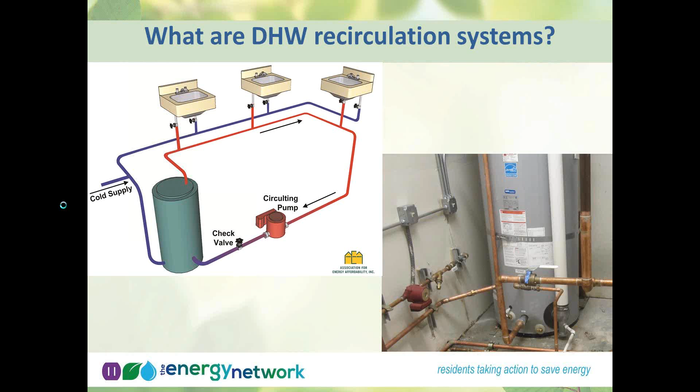So the agenda for today is to go through different types of recirculation control strategies, explain what issues might arise when implementing those controls or strategies, and then provide suggestions for evaluating existing buildings. Will your control strategy work, or will you potentially run into problems? And then if we have time, I'd like to discuss options for new construction projects as well.

And I'm going to break this down. The beginning, I think, will probably be more useful for building owners and auditors and raters alike. And then at the end, I'm going to get a little bit heavy into the diagnostic side. So spare me if that is beyond what you're interested in learning about. But if you're interested in getting into the diagnostics, that'll be in the second half.

Okay, so we have three different types in general, sort of groups of different types of recirculation control strategies. The typical recirculation control strategy is actually no strategy whatsoever, one where the pump runs continuously in the building. I would say this is what I see on most multifamily buildings, regardless of the building size.

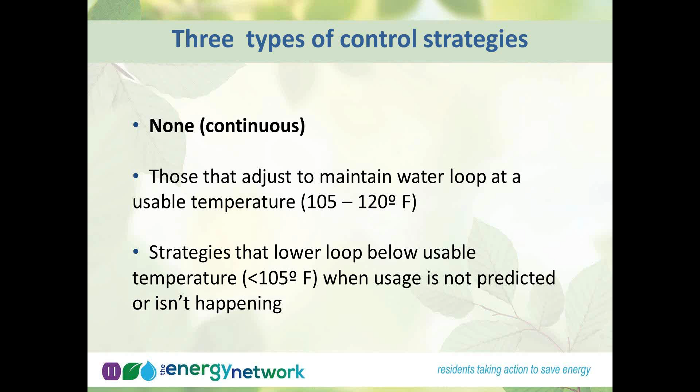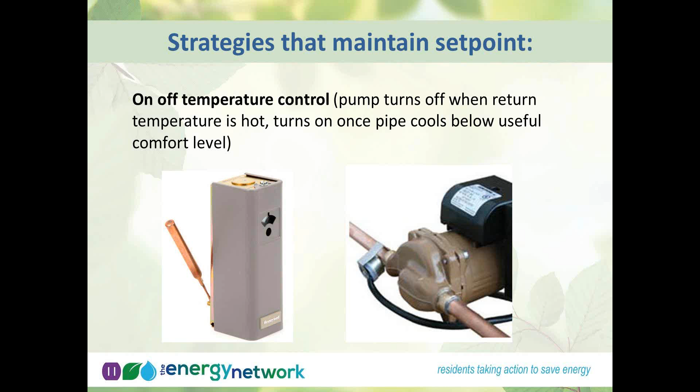And what's happening in this scenario is the circuit setter has been adjusted to reduce the total flow rate throughout the domestic hot water recirculation loop to just exactly the amount of flow that's needed to maintain hot water availability in the building. You'll see this a lot in buildings with aggressive water or hard water problems to reduce the corrosive effects of pumps that can damage piping over time. The other advantage is you can also reduce the flow rate to just maintain the temperature that you need in the pipe.

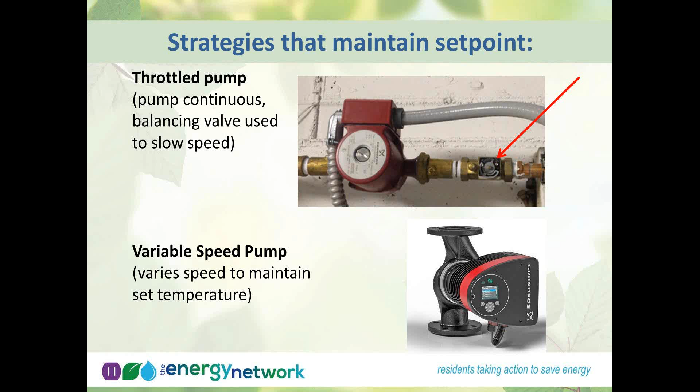And then we have strategies that lower the set point in the loop. And the idea here is that if nobody's using hot water, then you don't necessarily need to maintain usable hot water temperature in the loops. You only need that hot water to be at a usable temperature when somebody is about to use the water. And so lowering the loop set point can be achieved through the installation of a demand controller on your recirculation pump.

And these work by, there's a couple of different products available, but the general idea is that they will either use a flow switch or a temperature sensor to determine the usage patterns in the building, or when hot water is being used in the building. They'll use that information to only run the pump either when the demand is sensed or anticipated in the building, or when it senses that the return line has gotten too cool to be usable, and it might prime the loop just to keep the loop at a warm temperature, not cold, but not necessarily hot.

Then they have, I think a lot of you will probably be familiar with the single family demand type controlled pumps, which are a small pump that is controlled by the occupant of the building with either a push of a button, the activation of a motion sensor, or some other sort of trigger that will turn that pump on and circulate the water throughout the loop.

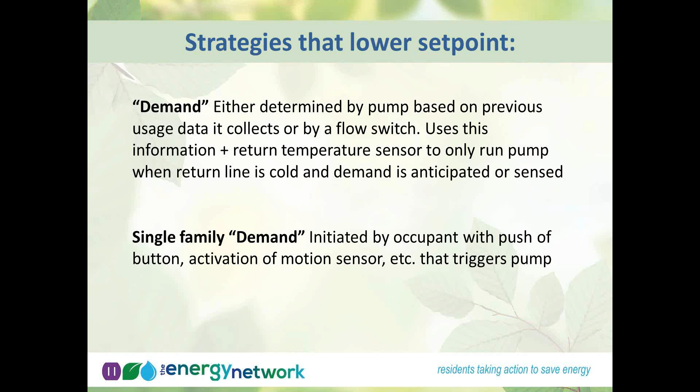And those are typically more prevalent in either single family homes or I would say very small multifamily buildings, lower than 5 units or 6 units, where maybe each tenant has a button, but typically not seen in multifamily central hot water systems. There's a couple of other controls that lower the set point of the loop in the building.

Another control option are what they consider to be boiler set point controls. And these don't actually control the recirculation pump, but they control the set point temperature of your domestic system. And sort of like a demand control, they will watch the demand profile of the building, and when it's sensed that there's not a large demand, that will reduce the set point temperature of the domestic system. I see this really as more of a load matching control than a demand control.

So when demand is sensed, the temperature will be increased in the system to what's anticipated that's needed, and when the demand isn't sensed, it will lower the temperature down to what still would remain as a usable temperature. And this is usually happening at night, or if you have a building that has a lot of working families, maybe during the daytime as well.

And then another sort of strategy that you might see are timers. And many recirculation pumps that you buy for domestic hot water recirculation will come with a timer built into the pump. I believe Title 24 code requires some sort of recirculation control, and one of those is a timer and aquastat type control. Unfortunately, in multifamily buildings, especially in larger multifamily buildings, we typically don't recommend a timer,

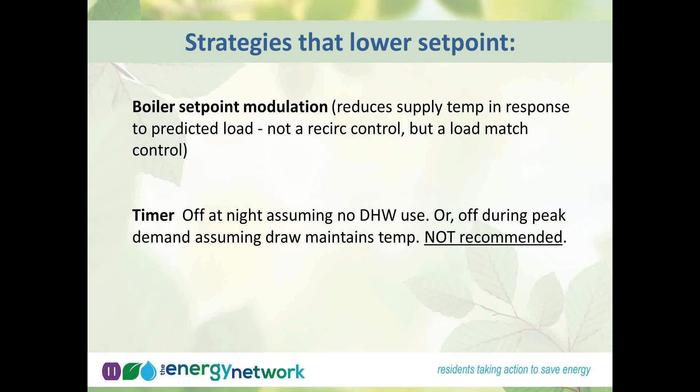So at this point, we've gone through the different control strategies, and I'd like to talk about the issues that might come up when implementing controls. And before I move forward, does anybody have any questions on any of the previous slides?

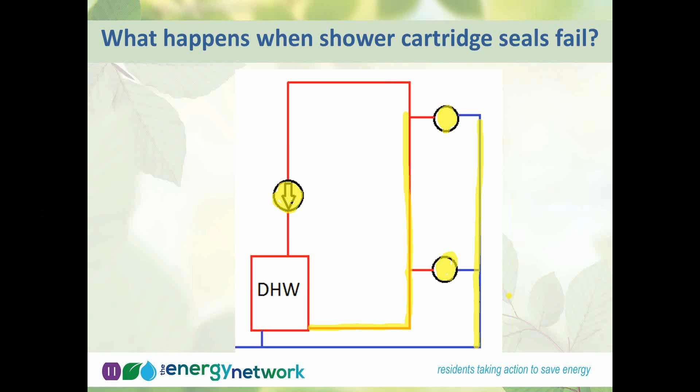Oh no. Highlights. There we go.

So what can happen with old mixing valves or old mixing cartridges that begin to fail is this issue called crossover, wherein somebody on, let's say, the second floor up here is using hot water, and the mixing cartridge seal on this first floor, if that has begun to fail, it may allow cold water to come through passively through this valve, enter the hot line, and come up here to the second story valve.

And so this person on the second floor will complain of either cool water temperatures coming out where it never quite gets hot, or it takes a long time to get hot. This could be a symptom that the unit below them or upstream of them, that their cartridge mixing valve has started to fail.

And this is typically just in single handle cartridge mixing valves, although there are some other instances where you might see crossover happening, typically in older washing machines. There might be a cross connection in a washing machine. And another anecdotal typical instance is if you have a janitor closet somewhere where they've installed their own shutoff valve on the sink and leave the handles turned on all the time. Those are opportunities for crossover in a building.

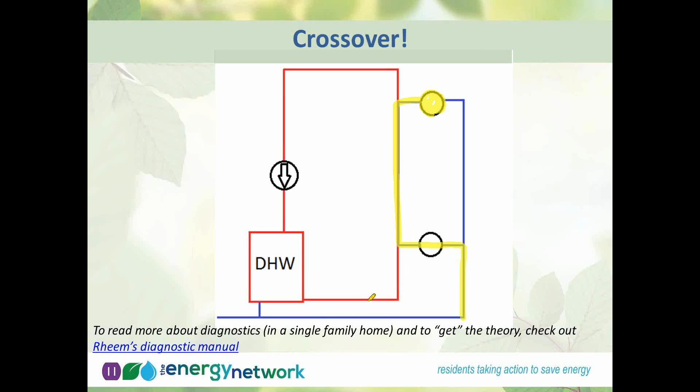So I think the point here with crossover too is that it's typically masked. The issue is masked when you have a constantly recirculating system. So in a constantly recirculating system, you might move enough water through this loop to dilute this cold water that's entering the line. And if that's the case, residents might not complain or might not know that there's a crossover issue until you start turning this pump on and off, which will allow the line to cool and allow this cold water to enter.

Some other symptoms of understanding when you might have a crossover connection with a constantly recirculating pump is if you go into your boiler room and you notice that the return line temperature, if you have a gauge or if you can measure the temperature of the water, is significantly lower than the temperature of the water going out to the building. So a large delta in temperature between the return and the supply can indicate that you have crossover.

I would say that in most buildings, if you don't have a large demand on hot water, a 5-degree temperature drop would be normal. A 20-degree temperature drop would be abnormal.

And then here we have a link, which I think we'll follow up. That link should work when you get your slides afterwards. That's a pretty good diagnostic manual for how to find crossover issues in a single-family building. But the idea and practice for diagnostics are well described for the single-family building.

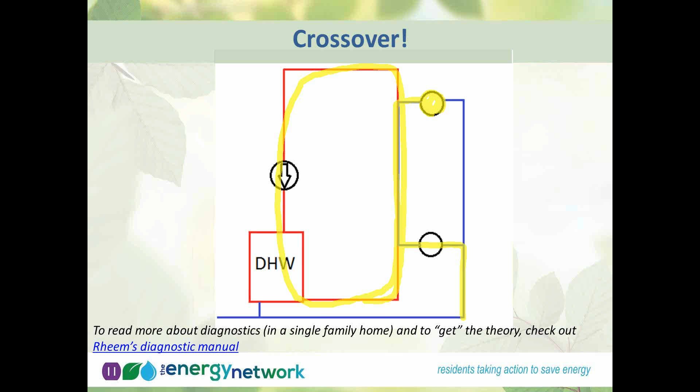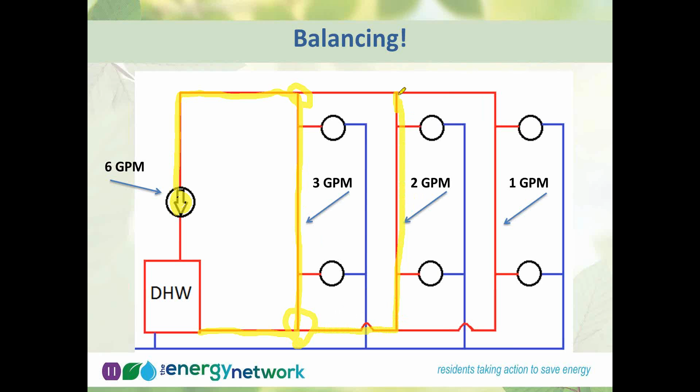And to explain this, you have the pump here that's circulating continuously. And it is going to look for the path of least resistance here when the pump is running, which is this path right here, closest to the pump. Most of the flow is going to go through this first riser unless there's some mechanism either here or here to encourage water to go to this second riser. So most of the water will go to this first riser, then some is going to continue to be circulated down this second riser, etc., down to the third riser.

So in practice, in a constantly recirculated building, this issue might not be noticed. You might move enough water through these further risers so these folks don't know that there's a reduced water temperature, that there's an issue, because you're constantly moving hot water through the system.

But in a bigger building, or in a building where maybe this is more aggravated, what can happen is this can actually result in a bigger spread of temperature imbalances. So that furthest riser might only be getting enough flow rate to maintain what would be considered less than usable temperature in the hot water line. And this can typically be aggravated when you start controlling that pump.

If you start turning it on and off, the first riser might look like it's fine. So the stack of folks over here will say, we're getting plenty of hot water. It's 125 degrees. In the boiler room, you look back here at the pump, you're getting 115 degrees back at the pump. This would indicate on first glance that everybody's okay. But if you go out here to this furthest riser and this pump is turning on and off, this third line might be cooling.

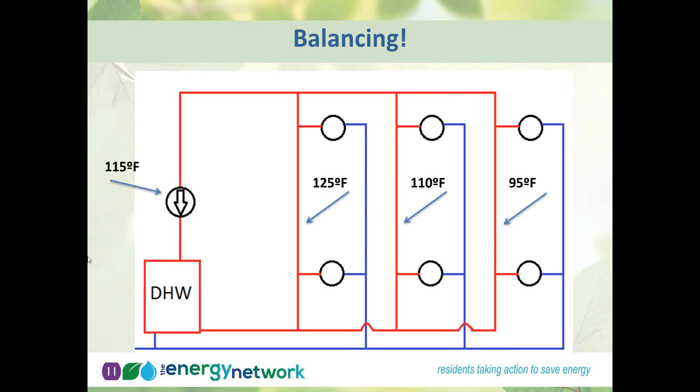So here's some other issues to consider when thinking about domestic hot water distribution in your building. I think most of us are considering or have installed lower flow shower heads and aerators, especially in light of the current drought. The thing to consider, however, is that by lowering the flow rates of those devices, that will further slow whatever delivery time you currently have to the fixture. So it's something to keep in mind.

I think we would always push to use more aggressive and lower flow rate shower heads and aerators. But if you currently have a delivery problem, sort of a long delay time in an apartment, this will make it worse. So this is sort of a flag to determine why the delivery time currently isn't working and come up with some strategies to fix that, in conjunction maybe with installing shower heads and aerators.

Contractors are pretty knowledgeable with standard recirculation control systems, but, to generalize, they're just starting to become familiar with central system demand controls. So if you're trying to implement a new strategy, you will want to look for a contractor that has previous knowledge with the system, or work with a manufacturer's representative who can work with you and the contractor to make sure the control is installed properly.

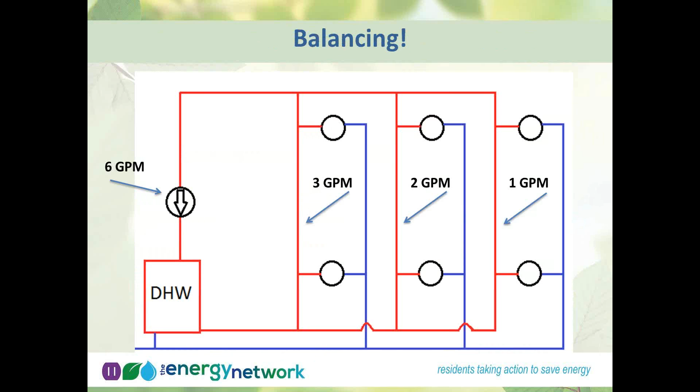So one other thing I didn't mention on crossover that sort of helps understand why this might happen is that the cold line is coming in at your city pressure to the building, which might be, for example, 50 psi. The recirculation pump, when it's operating, induces a lower pressure in the return line that's before the pump, which will lower the pressure on this line.

So typically, crossover happens when you have a higher pressure water moving to a lower pressure water. So in this case, cold moving over to hot. And that's, I would say, more typical, but I have heard of the opposite being true, where hot can move into the cold line.

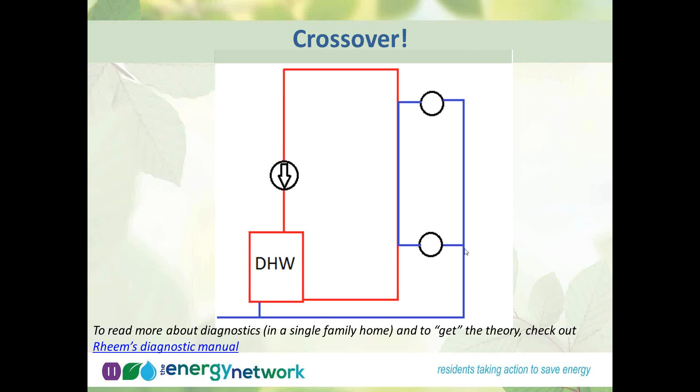Okay. Is it possible that it's an example of cartridge seals failing? It could be, although I would look for any other sort of crossover opportunities that might be happening at the building. The washing machine example or the janitor closet example. But I'll talk a little bit about cartridge mixing valves and some suggestions for how that might get fixed as a trial. Great.

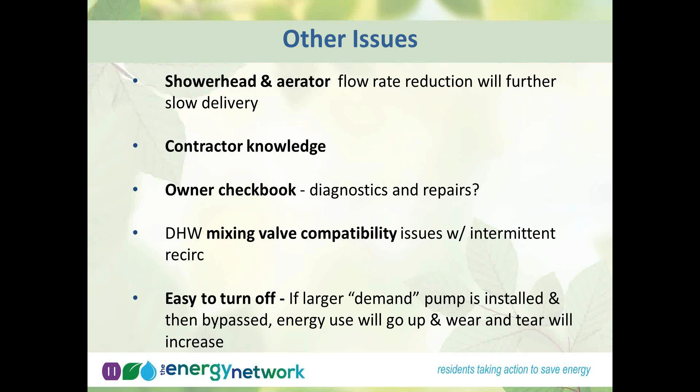Got lost here. Okay, so my other two soapbox notes here on controls are that the studies I mentioned at the beginning of the presentation focused on gas savings. I'd really like to see future studies also include water consumption monitoring to make sure that we're not just looking at one half of the picture.

We want to make sure that we're not causing any sort of additional water use where, let's say, a control gets installed, it's doing what's expected, it's cycling the pump, but maybe residents now have to wait longer. Maybe Joe in that upper apartment has to let the water run for 5 minutes to get hot water. We want to make sure, especially in California, that even if we're saving some gas, we're not wasting water in the process.

And then, lastly, if you have a domestic hot water recirculation problem in the building and you implement a control strategy, those problems will only get worse. They're never going to solve your problem. So that leads me into, how do we know if we're going to have a problem? And then what do we do to fix it? I'm going to try and speed up a little bit here too.

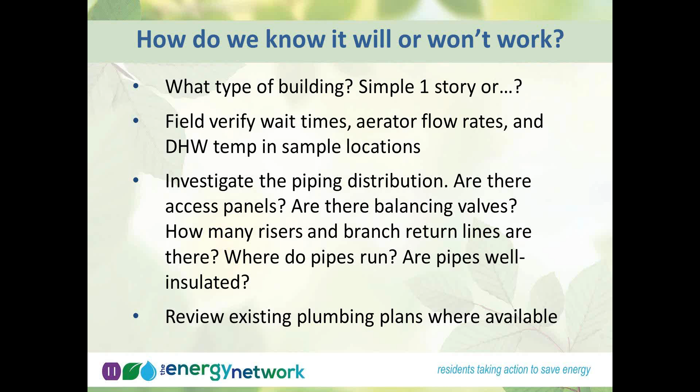Interview the staff. Ask them if they've had any temperature complaints. And you might be able to ask residents this as well to get their opinion, because sometimes maintenance staff don't always have the same story that the residents have.

You could ask the maintenance staff, hey, if this recirculation pump turns off, how long does it take to have a resident complain? And if they say, oh, usually a few hours or 4 or 5 hours, then I think that would give you pretty good confidence that cycling your pump on and off will not create an immediate problem.

But if they say, if I turn this pump off, I'll have a complaint in 30 minutes or an hour, that might be a good indication that there's something happening out in the field that needs to get fixed.

You can ask them how often they change their cartridge mixing valves. And if their answer is, what's a cartridge mixing valve? Then you probably have a good indication that no maintenance has been done on those mixing valves and that repair is needed. Same thing goes for a question about crossover.

If you ask them about whether they've had crossover in the building and they're not familiar with the idea, then that might give you an opportunity to dig a little bit further. And conversely, if they know about crossover and they know about cartridge mixing valves, then that would give you some reassurance that maybe some preventative maintenance has been done.

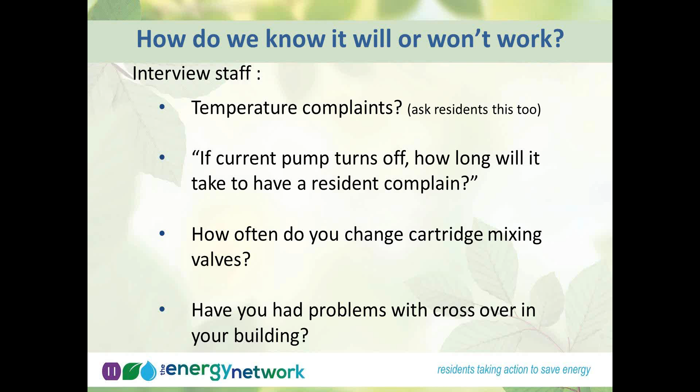So some other suggestions here. Find those plumbing plans if you can on these larger buildings, and study and understand the distribution system, and ask for help from colleagues if needed. I would definitely recommend bringing out a manufacturer's representative of whatever control you're planning to install to have them assist in understanding whether their control is compatible with the project, and to be part of the team to make sure that the project is a success when you do put that control in.

And then another suggestion is to read Dan Holohan's books. Dan Holohan is well known for writing books on domestic hot water, hydronic, and steam systems, and he has really good suggestions on how to understand how water moves through a system or through a building. He always likes to say, think like water.

And a domestic hot water system is a lot like a hydronic system until somebody opens a tap. So understanding how hydronic heating systems work can help you understand how a domestic hot water recirculation system will work. And I always recommend, find the problem in the building before it finds you, and make sure you have a solution developed to fix that problem if it does show up.

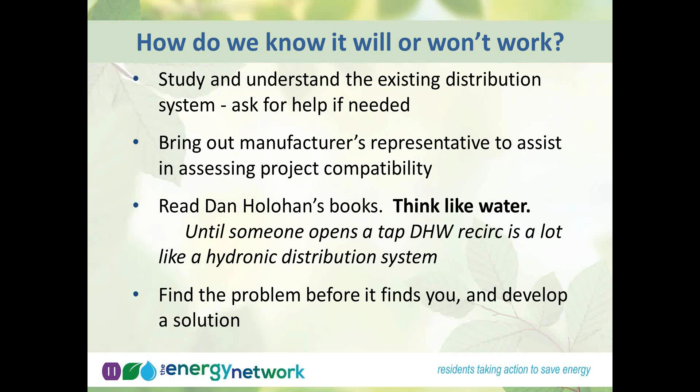Getting back to the checkbook, make sure you have a budget for making necessary repairs. As we said beforehand, controls will make a situation worse if there are existing issues. And then identify what control strategy is most appropriate.

If you look through the plumbing diagram, and making a demand control work in a large, complicated property or distribution system does not seem like it will be feasible, or will be complicated or expensive, a simpler control strategy may be the right strategy for that building. Again, we don't want to put a control in a building where we might cause an issue that leads to significant water waste.

And then you'll definitely want owner and staff buy-in. If they're not bought into the project, then you might install a control, and if it doesn't work, a week or two later, it might get bypassed, and that basically is money down the toilet. They invested in something that isn't working.

So you really want to make sure they're engaged in the project and bought in, and make those repairs visible to the owner that you've identified early on. They currently don't know that there's a problem sometimes. That crossover issue might be happening, but they don't know that it exists. You have to make these necessary repairs visible to the owner.

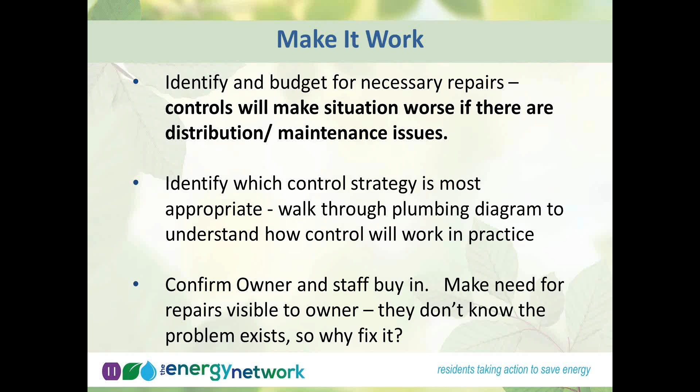And then the last thought here is a suggestion for phasing improvements to make your troubleshooting more effective. If you install aerators, you install controls, and do lots of work on the system all at once, and then start getting any sort of complaint, you'll have a hard time deducing where that complaint is coming from, or what the issue is. So my suggestion when you're working on domestic hot water recirculation control is, first, make sure you solve all of your known problems first. Make sure all of the apartments quickly receive consistent hot water.

Then install any low flow devices that you're considering, so shower heads and aerators. Wait a little bit, let's say a week or two, make sure there aren't any new problems. And then three, once you've ensured that there aren't any issues, install recirculation controls, and then make sure there aren't any new problems.

And I think another thing to mention here, something that happens typically that I run into, is you don't know the problems exist until you actually start talking to your residents. So I would even say with number one, interview your residents and find out if there are any issues. Then if there are issues, you can solve them first. You don't want to get down to the end of your project and find out that Joe in that apartment has been having a problem for 5 years, and always lets his shower run for 15 minutes before getting hot water.

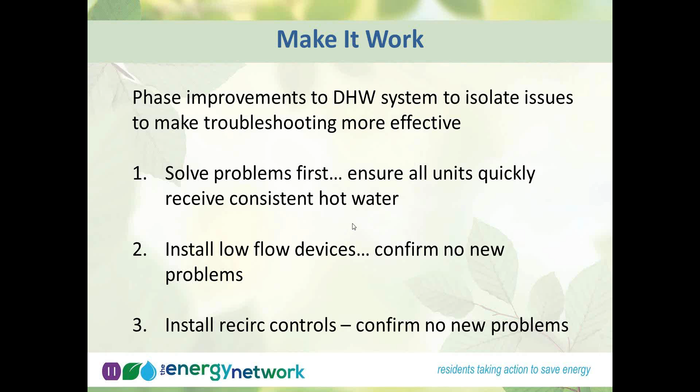We do have one question. However, it is specific to single-family homes, so I'm not sure if you'll be able to answer, but do you have a quick answer for what's the best solution for existing single-family homes and what potentially is the cost for that?

I think it really depends. In my opinion, the best solution for a single-family home is the use of a demand-controlled type pump, because if the owner is motivated to engage with their system and they don't expect it to work silently behind the scenes, then the kind where they push a button when they want hot water or trigger a motion sensor are typically the most effective recirculation control strategies. So only running the pump when needed. The timer or a variable speed pump or any of those other strategies would really run the pump much longer than it would need to.

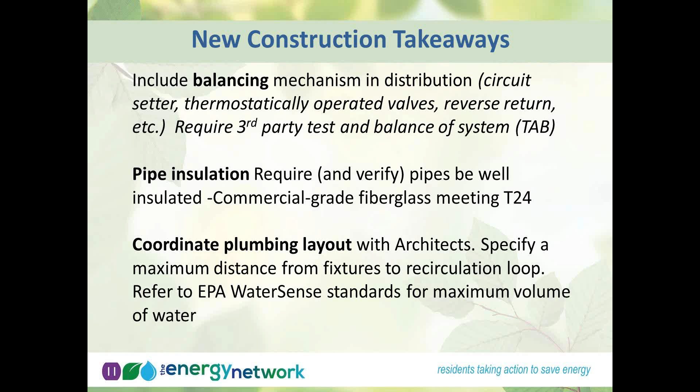So back to the new construction takeaways. Once you've designed and put in an efficient distribution system, so well-insulated pipes, balanced piping system, and short plumbing runs or trunk runs to the plumbing risers, then you can choose whatever control strategy you think is going to be the most effective at reducing your hot water gas usage. And I would recommend either a variable speed pumping system where you're using one of these newer pumps that will speed up and slow down based on a temperature that you set. And I would usually recommend that for maybe larger buildings. It might require multiple pumps for different branches. There's a variety of different things you could do to achieve a balanced system.

Or use a demand-controlled pump, which, if you have balanced risers and well-insulated pipes, should work properly. And if you have a larger building, you might use multiple small demand-controlled pumps throughout the building. And I would engage the manufacturer's representative of the control you're considering to work with you to make sure that pump is sized properly for doing a demand-controlled type of strategy.

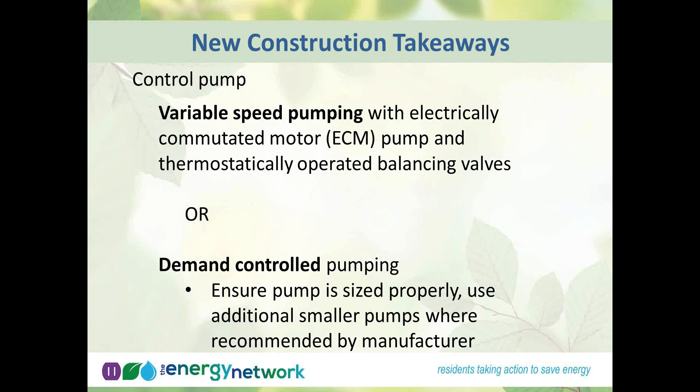And a couple other thoughts here. If it turns out that your in-unit fixtures are remote from that central recirculation line, or are remote from maybe even their in-unit water heater, and this is pretty typical for new construction townhome type setups where the water heater might be located on an in-unit basis, maybe on the resident's porch, and their bathroom or kitchen might be relatively far away from that, you might want to include in-unit unitary demand-controlled pumps, the sort of residential version for each unit.

And these also could be considered for retrofit situations where you have a townhome or a situation where each resident has their own water heater, but it's pretty far away from their fixture. And for new construction, I would encourage you to, if it's not already required by your local municipality, sub-meter tenants or direct meter tenants for their water consumption. That's a great feedback mechanism to tenants and will help immediately sort of keep water consumption in check.

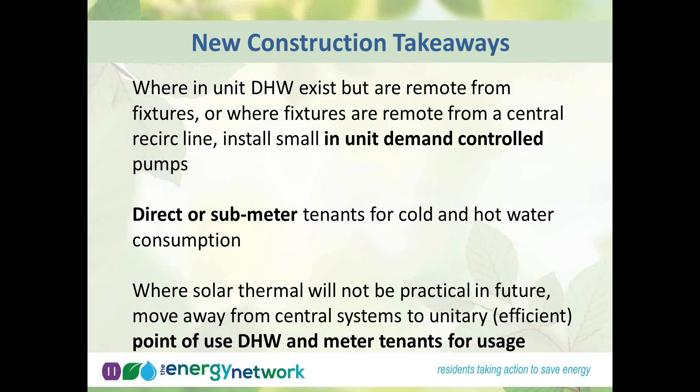Okay, that's the end of the presentation. Does anybody have any questions?